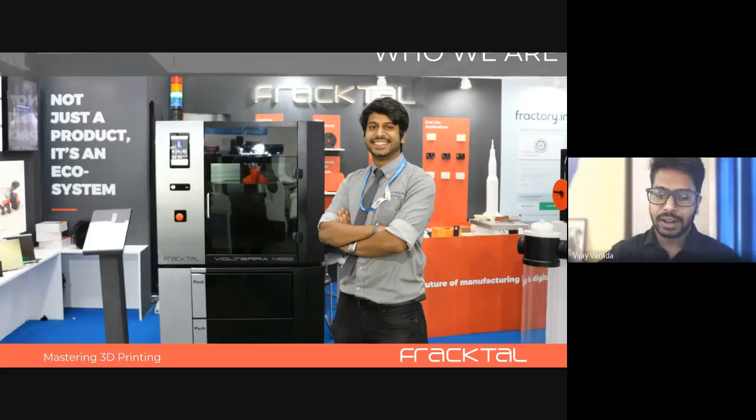So let's start. Before that, I think it's a good idea to give you an understanding of who we are as a company, what we are doing in 3D printing in India, what we really do, and what our journey with 3D printing looks like - what are the things we've done with it.

In 2018, we set up the world's first 3D printed wind turbine in Antarctica in the nation's colors. This demonstrates the usage of 3D printing in making access to high quality manufacturing ubiquitous. As a company, even though we're technologists who go hardcore into building better machines every day, we love using this technology and trying to apply it to solve different problems.

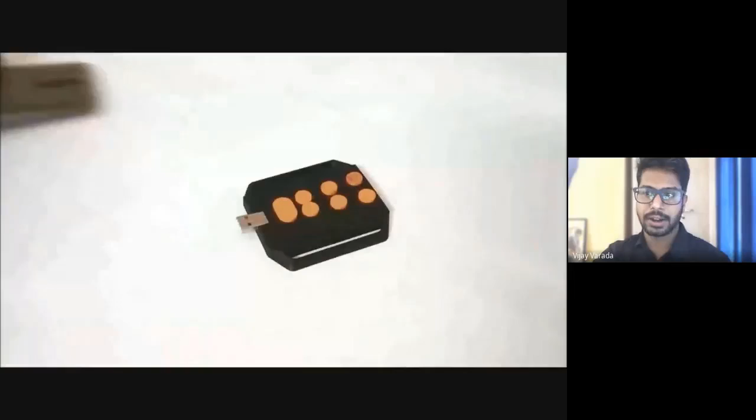Another project was using 3D printing to build an open source braille keypad that blind people can use to operate a smartphone, since smartphones don't have any physical buttons.

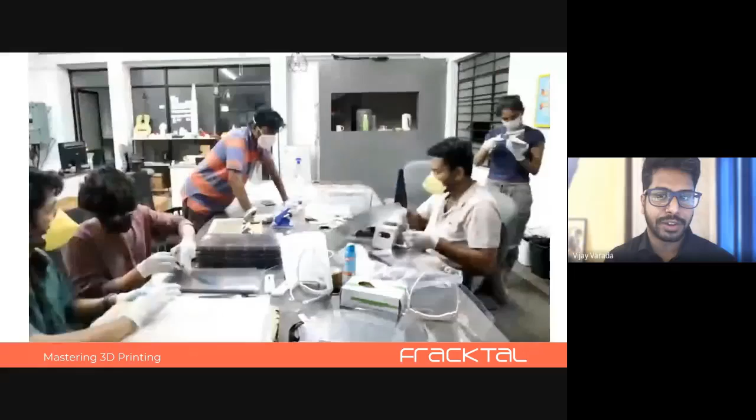During the pandemic, while global supply chains were broken down and nobody was manufacturing anything, we used 3D printing to get started with manufacturing. We used our 3D printers to distribute over 2 lakh face shields and PPE kits to healthcare workers and frontline workers all across the country. So the last year has been really exciting for how 3D printing has enabled us to come back into the limelight about how this different route to manufacturing can be beneficial to all of humankind.

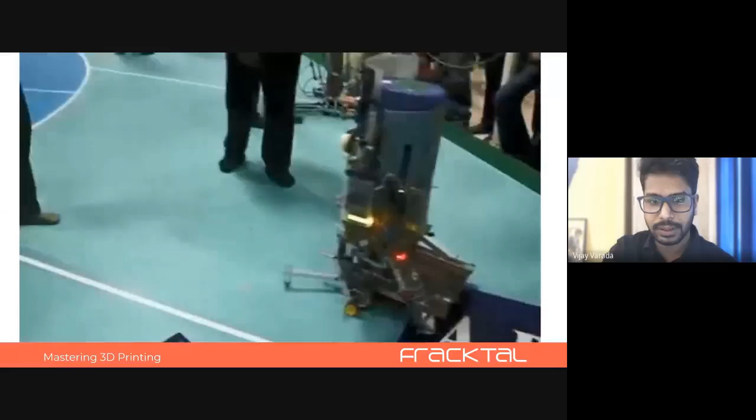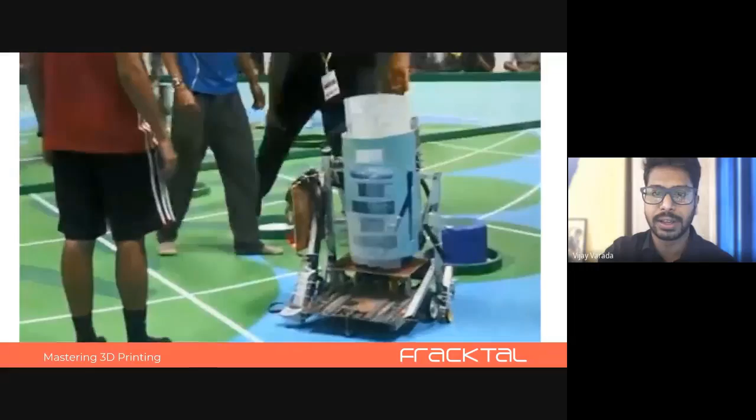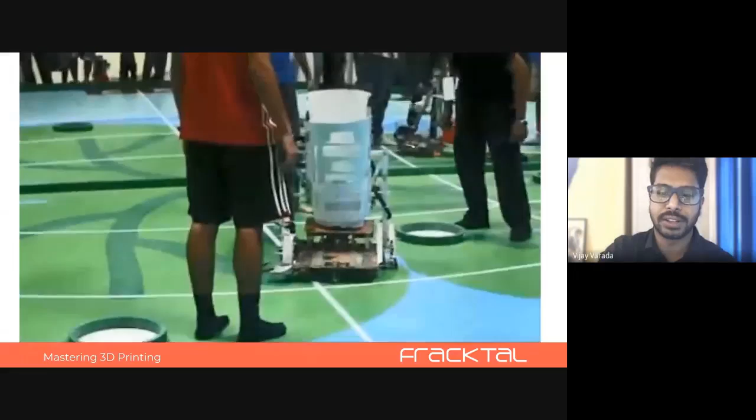So basically, 3D printing has enabled, say for example, a couple of college students - this was the robot we were building in college, with plywood and bits of plastic and things like that - 3D printing sort of enabled us to start our own company when we were still in college. And I think this is the significant aspect, and one of the reasons why I love 3D printing: it levels the playing field when it comes to high quality manufacturing.

It democratizes manufacturing. It gives high quality manufacturing within the hands of everybody. Our 3D printers would manufacture parts for other 3D printers, and we would meet up after class and build machines. That's how we started the company when I was in the 3rd year of engineering in MIT Manipal. It's been 8 years since then.

And since then we've grown the team. We're building large industrial machines in FDM, and now we're getting into SLA as well as the MIM space when it comes to metal 3D printing. So 3D printing itself has enabled us to build better products and move up the value chain when it comes to technology.

So coming to the big why - why are we doing what we're doing? Why am I here in this talk talking to you about the applications of 3D printing? It's because over the years, I've seen how exciting 3D printing can be, how liberating 3D printing can be, how empowering 3D printing can be.

But all of these are just examples, really, because the majority of the industry is still using traditional processes while 3D printing exists. My hope is to use this forum to plant the seed of curiosity about how 3D printing can apply to actual industry and add value to those industries, and thereby add value to the Indian economy. I think 3D printing has a big role to play in the Indian economy, and we'll see why I think so in the following slides.

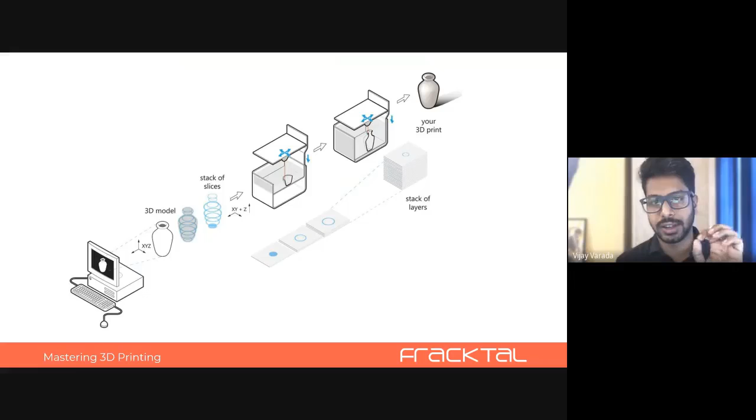I think that will give you context to the applications I'm going to be talking about - what does the core functionality of 3D printing have to do with the economics of manufacturing, and why exactly is 3D printing seen to be this next revolution? It's not the fact that it's additive, but the fact that it means certain things to the way we manufacture products today. One of the things is that 3D printing is a form of direct digital manufacturing, DDM, where you take your CAD file, your 3D design file, and send it to a 3D printer, and it gets manufactured in one single step, and you get a final product.

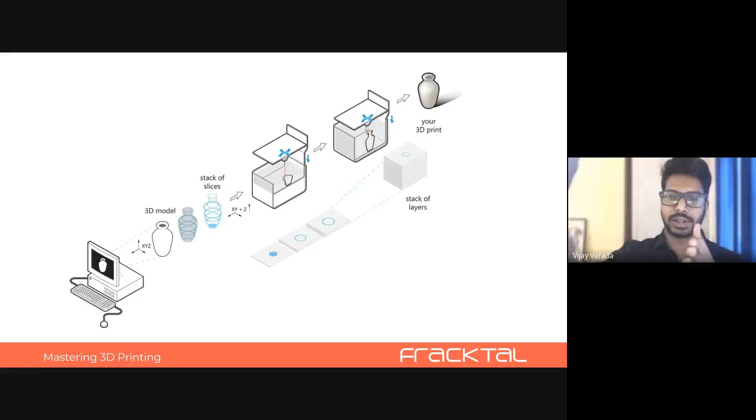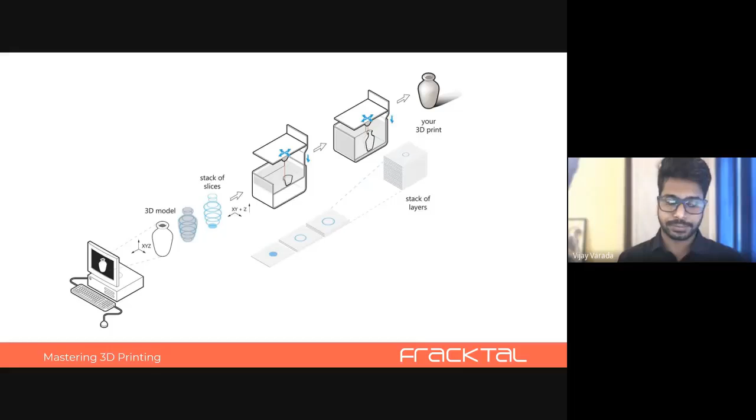This is in contrast to how traditional manufacturing works - say, for example, CNC machining or casting. You have several steps in between where you are manufacturing the tool, then using the tool to manufacture the final product. In injection molding, you make the tool first. In investment casting, you make another tool - making the wax master, coating it with slurry, burning it, pouring metal into it. So there are multiple stages in that manufacturing process, whereas in 3D printing it's a one-step manufacturing process. I think this is important to understand when comparing these traditional technologies with 3D printing.

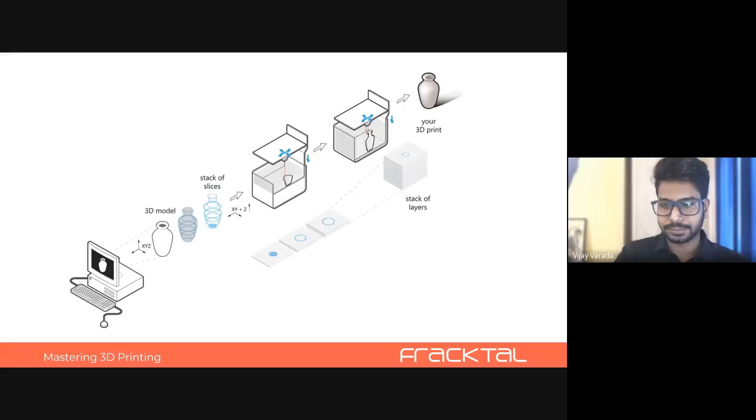Another question I get commonly asked is: is 3D printing going to replace traditional technologies like CNC machining or injection molding, or is it just too slow to compare? The answer is yes and no. 3D printing will replace traditional manufacturing in certain applications, and in certain applications, traditional manufacturing is still going to be the way to go. So 3D printing and traditional manufacturing are going to work together.

In subtractive machining or injection molding, the cost of making one part is incredibly expensive, because you have to create the tool path and figure out any tooling required. In injection molding, there's a large cost for the initial setup, your non-recurring expense, your tooling expense. With every subsequent part you make, the cost comes down. So there's a clear break-even point where additive manufacturing is preferred over subtractive manufacturing, and vice versa.

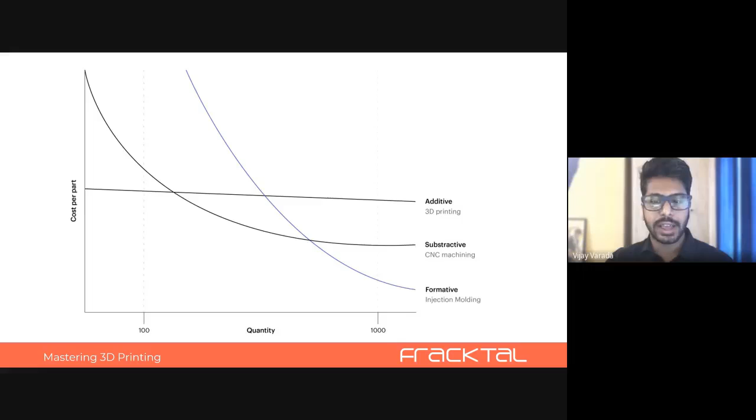So it really depends on the quantity of parts you are manufacturing. Depending on the quantity you want to make, you would select between a traditional manufacturing process or 3D printing. But there is a caveat to this, when it comes down to complexity.

There are a large number of examples of this, where you're consolidating various parts together into one complex part, especially when the volumes required are low. For example, in performance automotive or aerospace applications, where volumes are low but complexity is very high, 3D printing becomes a perfect candidate for manufacturing compared to traditional technologies.

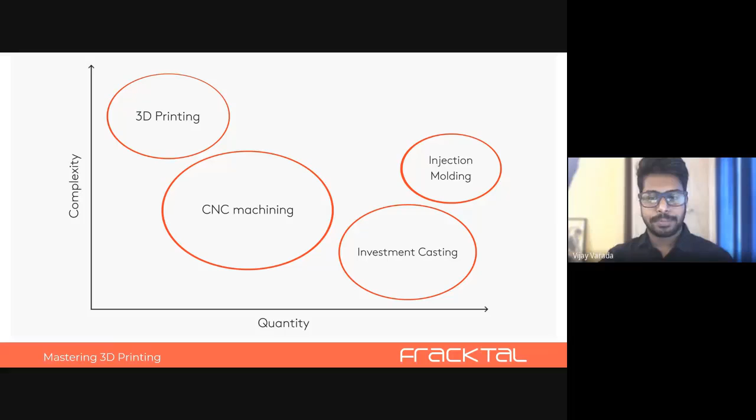For example, injection molding might get slightly incrementally better over time when it comes to cost, but 3D printing can take a completely different trajectory when it comes to replacing injection molding. That's what I mean by how 3D printing can be disruptive in several industries — they take a completely different graph altogether compared to how casting, forming, or forging works.

With that, we start on the different applications of 3D printing, which I've seen startups in India directly working with, and which are possibly things that would require people like yourselves to research more and apply, so that more industries can adopt it.

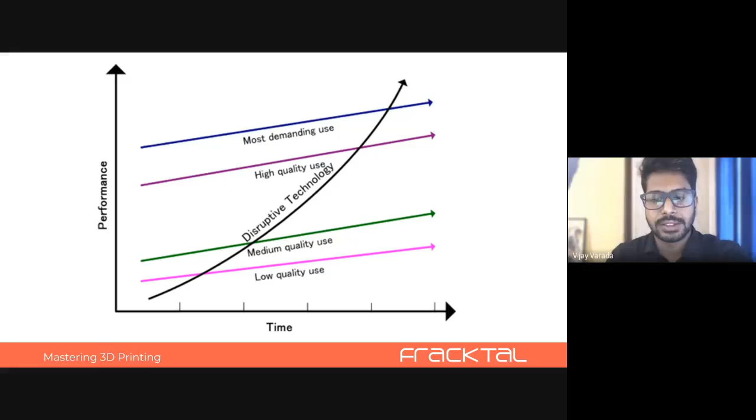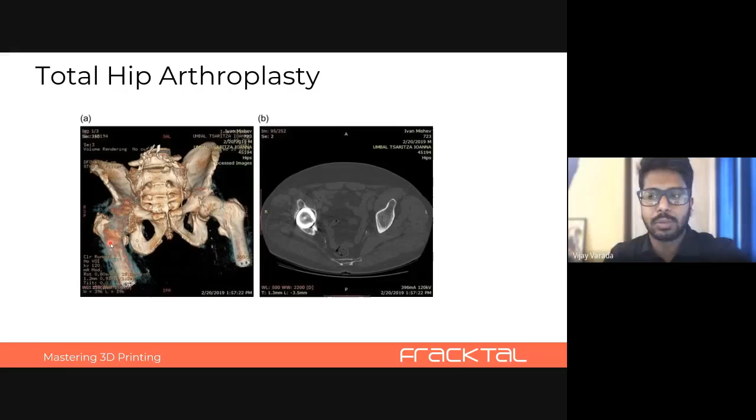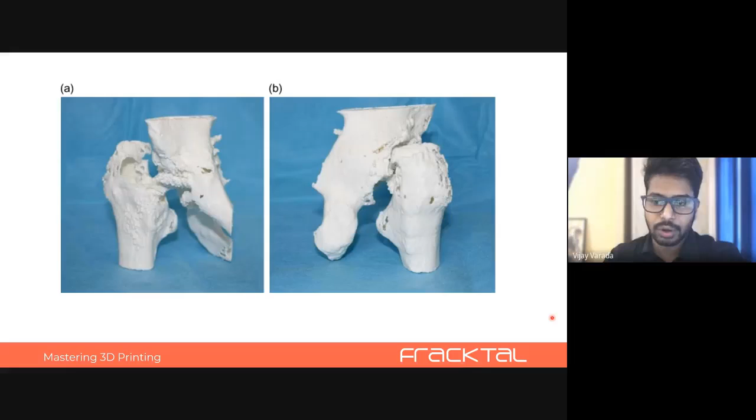So what doctors do is take the 3D model of the scan and then 3D print it. With this process, just by looking at it in addition to the CT scan, they can easily figure out all the parts of the bone which have the deficiency, and plan the surgery a lot better. For example, in hip replacement surgery, this is actually a drill used to drill a cavity in the leftover bone so that an implant can be made.

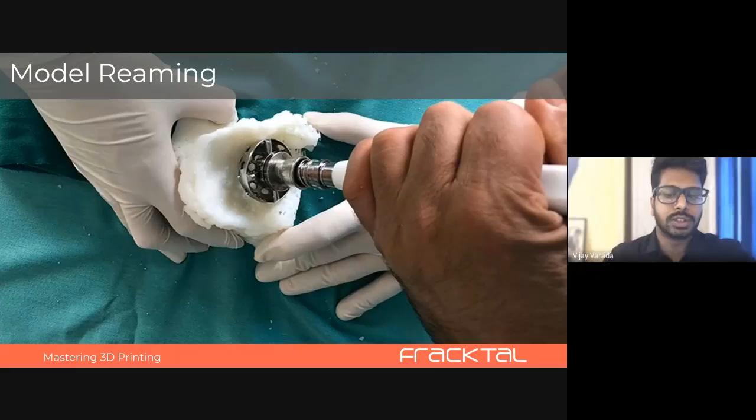Instead of doing this on a live patient, all of these things are done on the 3D printed part itself. The model allowed pre-operative surgical drilling, simulating the position in which the drill should be placed.

Afterwards, the acetabular cup is selected - what is the size of the cup, the ball socket that needs to be implanted into the hip - and all of this was done on the 3D printed part itself.

Traditionally, all these steps are done while the patient is on the operating table itself. Doing this beforehand, making sure you've selected the right components and know how your tooling is going to work and where to remove material, bone, and drill, improves the chances of surgery success. The patient is on the operation table for a much lesser amount of time, the doctor is not as stressed, and the chances of success in the surgery is way more.

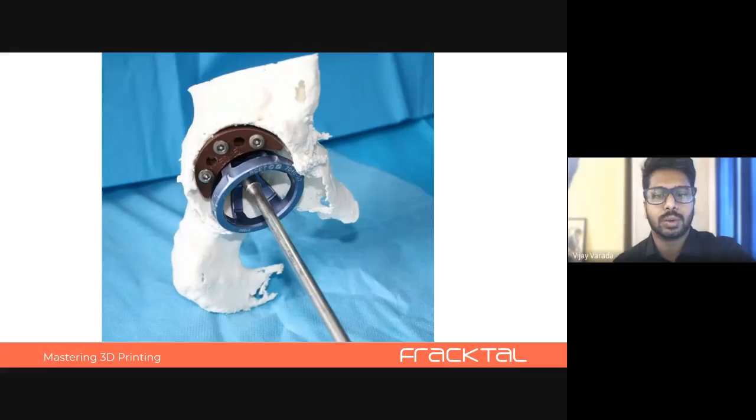Another example is where 3D printing was used as an implant itself by one of our customers. It started with a 3D printed mold created using the negative of a bone flap. A trauma patient met with an accident and lost part of her skull flap, so that part of the skull flap was modeled on a computer. The negative of that was taken and the mold was created, and using bone cement and titanium mesh, a skull flap was created and was subsequently implanted into the person.

So this is an example of implants. We've seen how 3D printing can be used for pre-operative surgery planning, where it's completely non-invasive and will help doctors perform the surgeries better, and also how it helps in implants as well.

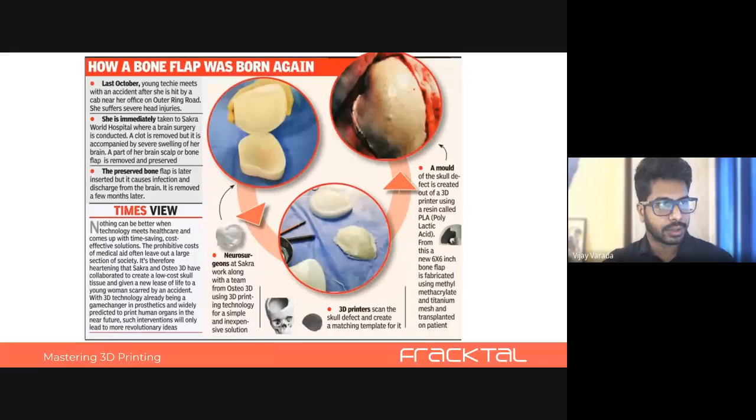So in summary, for this particular application, 3D printing helps get to an accurate diagnosis when it comes down to maxillofacial surgery, any sort of orthopedic surgery, and determines the best course of treatment in the pre-operative planning process, where the entire surgery can be planned out before actually being performed.

Next, we'll look at transportation. There's a lot of interesting things happening in this space. Let me give you an example of the kind of things that can be 3D printed.

From electrical connectors, hand rests, and headrests, food trays, industrial HVAC systems, air conditioning systems - all of these parts, say for example if you take a train, are custom made for that one train. Knowing about 3D printing, it's straightforward to know you can manufacture these parts on a 3D printer, but what are the benefits of it?

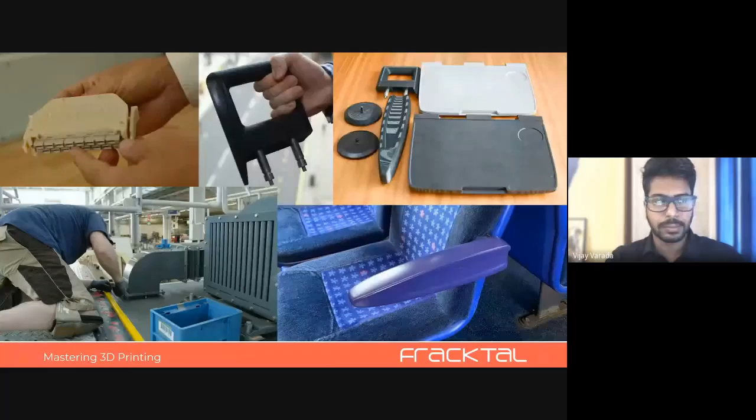Let's look at that. I've divided all the applications of 3D printing, and I'll talk to you about the kind of parts you can do with 3D printing across these 4 categories.

Starting at bridge parts - what are bridge parts? Basically, in rail, whether it's metro rail or intercity rail, interstate rail, the cost of having a coach or a train out of service is massive. The cost of having a single commuter train out of operation is lakhs of rupees in a day. With financial penalties adding up quickly, finding replacement parts fast is critical, because the alternative would be that the train needs to be kept out of commission for weeks. So bridge parts are basically parts used while you're still figuring out where you're getting the end parts done - it becomes a bridge between your problem right now and a solution later on.

Next comes low volume spare parts. Again taking the example of rail, costs for spare parts in the rail industry are incredibly expensive. This is because generally the service industry, second tier vendors, third tier vendors have to hold inventory for 30 years plus. Not only is keeping stock for 30 years expensive in terms of carrying costs, shrinkage, spoilage, but it's inevitable that some parts will go out of stock. When parts are not available in stock, they have to be recreated from scratch - this is where 3D printing is a massive game changer when it comes to the rail industry.

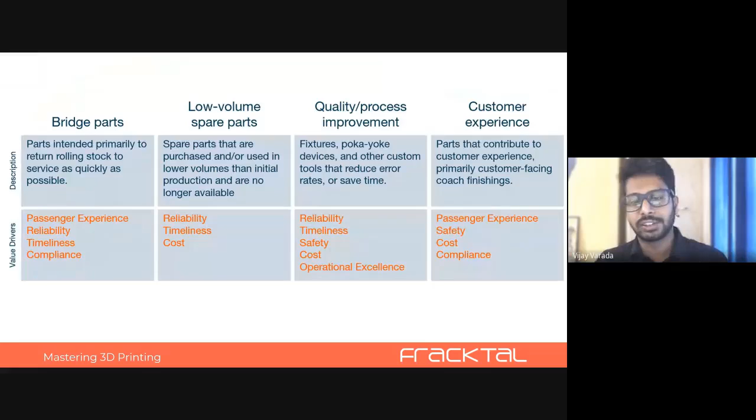I've already talked about the kind of parts you can make and explained the different categories of parts. But I think the next slide will give you a good understanding of the disruption that 3D printing brings.

Generally you have to overproduce and keep parts in stock, and then you have inventory carrying costs, shrinkage, and obsolescence. Will you still use that part 2-3 years or 10 years down the line, or will it change?

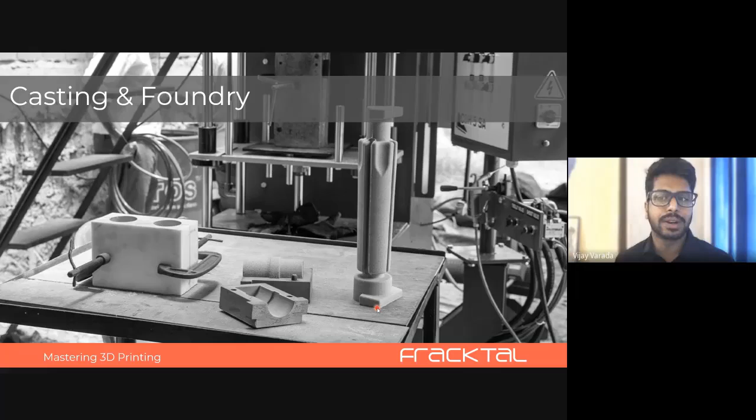Now coming to, I think, my favorite applications of 3D printing: 3D printing for tooling. This is definitely the lowest hanging fruit, in my opinion, when it comes to deriving value out of 3D printing, especially in the Indian industry. We've done a lot of work with Indian customers across industries about how 3D printing can be used to lower the cost of tooling itself.

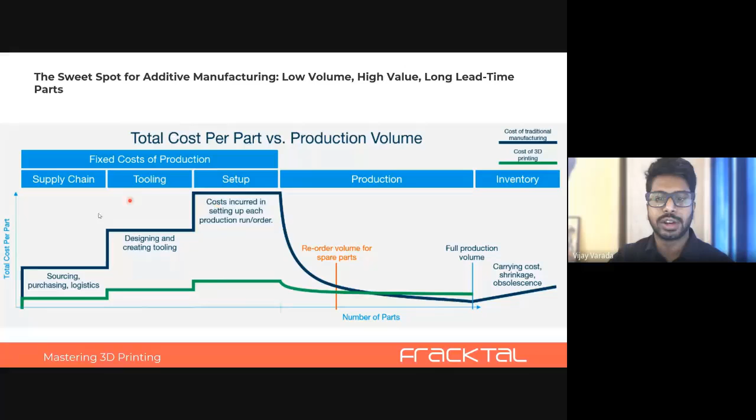Going back to this slide: the cost of tooling and setup is high. With 3D printing, you're still producing parts in a traditional manner, but 3D printing is used to reduce these tooling costs—starting with casting. I'll talk about sand casting as well as investment casting, metal manufacturing technologies made for volume manufacturing of metal parts. Casting in general forms a large part of the Indian industry—I think India is second or third in the world for casting production in terms of tonnage.

Across automotive, power, railways, pipes and fittings, construction, sanitary ware, engines—again, a lot of applications that use casting.

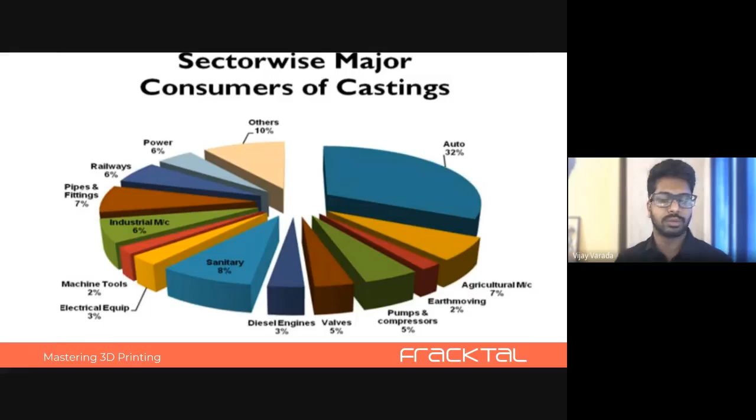So at least when it comes down to pattern making, how casting works is that you need to make one of these patterns, whether it's aluminum or wood, and this pattern creates a cavity in sand, and then you pour.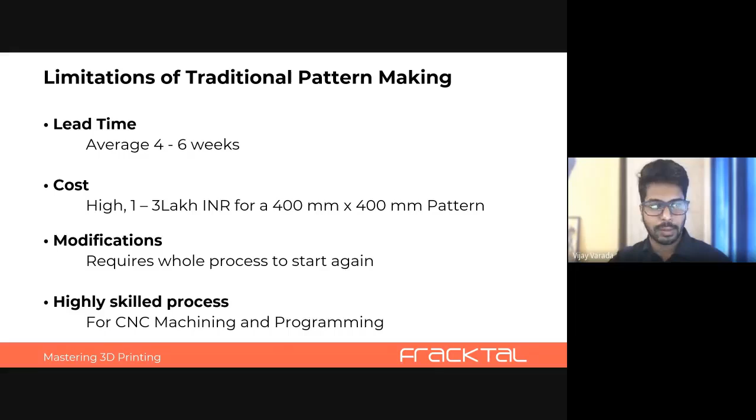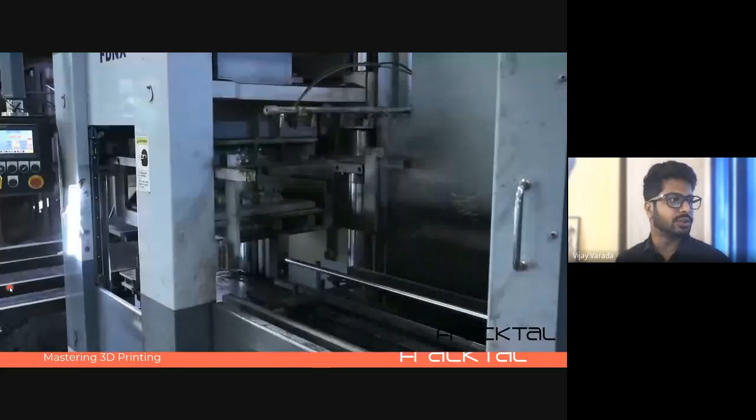So 3D printing really completely changes the game when it comes down to pattern making. You can see over here where we've put 3D printed patterns on a traditional match plate, and use the same process which is used by aluminum for packing the sand in a high pressure sand packing machine.

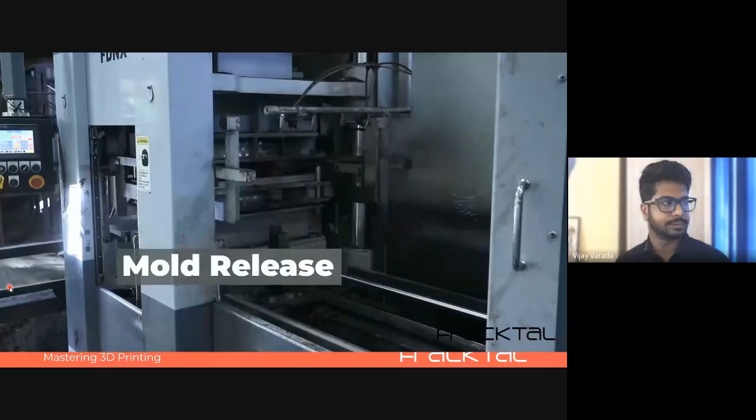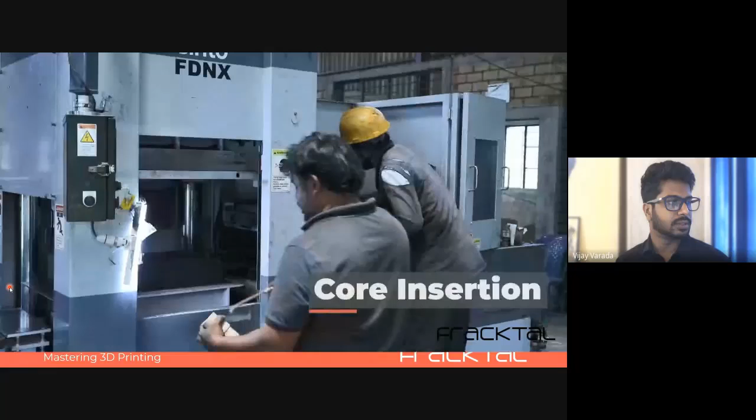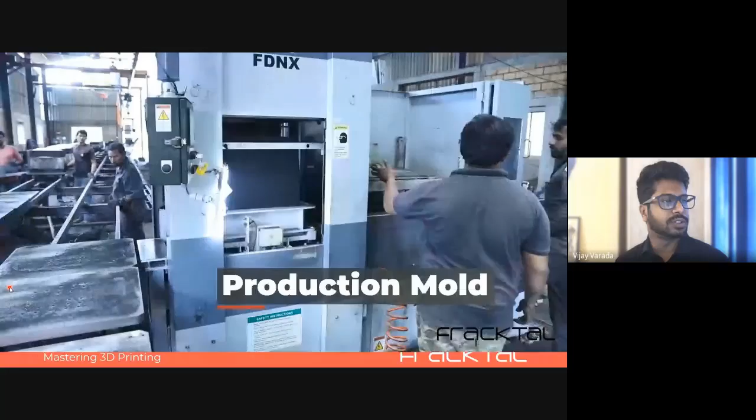And then even the cores, the core boxes that are used to create the cores as well—it's more or less, at least in this case, the entire process of using CNC machining and wood patterns for making out of wood or aluminum is completely replaced by 3D printing.

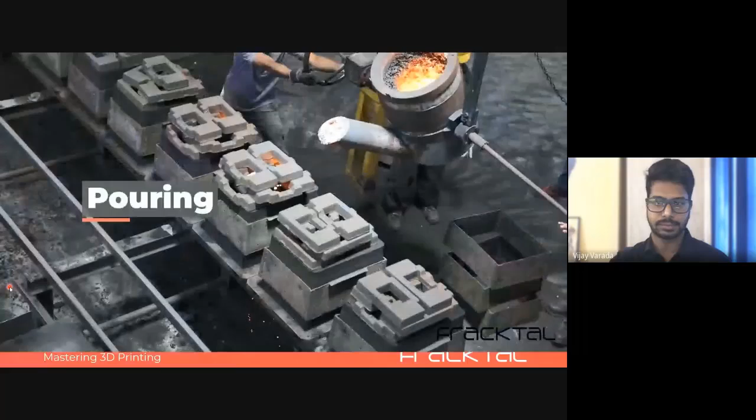What are the key benefits of using 3D printing for say casting or sand casting in general? Average lead time savings is 30 to 70%, where mods take 4 to 7 days instead of waiting a month or two. Cost reduction is great, 60 to 80%.

And because you're using 3D printing, you can always iterate things. For example, the casting industry is seen more as an art than a science when it comes down to how metal flows in the gating and runner system. So the process itself requires a number of iterations.

So for example, modifications when it comes down to the gating and runner systems of sand casting, and the optional use of interchangeable components if you need—if something's not working out, interchange it with something else. That's a really exciting thing to see with 3D printing, where you are iterating the tool itself so that you're getting the parameter you want.

And again, 3D printing as a process for production is completely automated. Once you give the part, the process of manufacturing is automated.

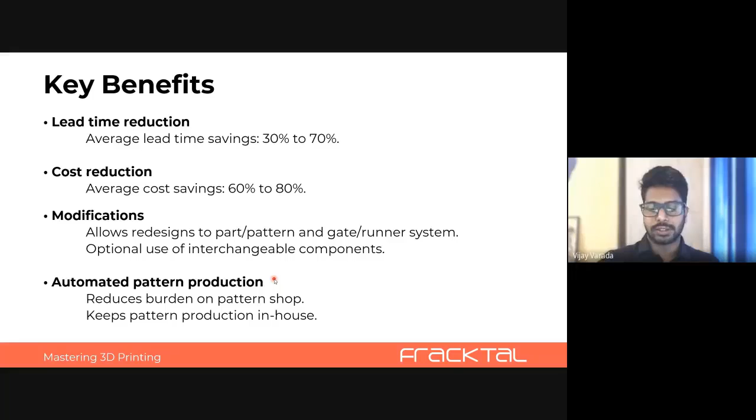So how does 3D printing compete when it comes down to performance? We did some research on this. Wooden patterns are what's popularly used—you would either hand carve it or use CNC machine wooden patterns, and it takes 2 to 3 weeks to make. It costs 25,000.

This is generally what's done by the industry for low cost, low volume patterns. Because the sand has some amount of moisture, the wood absorbs that moisture, bloats up, and changes the dimensional tolerances and things like that. So it's applicable for less than 100 sand molds.

Aluminum pattern is what is used for high volume manufacturing. Most automotive components might be using aluminum patterns, and you can get really high volume with this. But getting this tool made is extremely expensive as well.

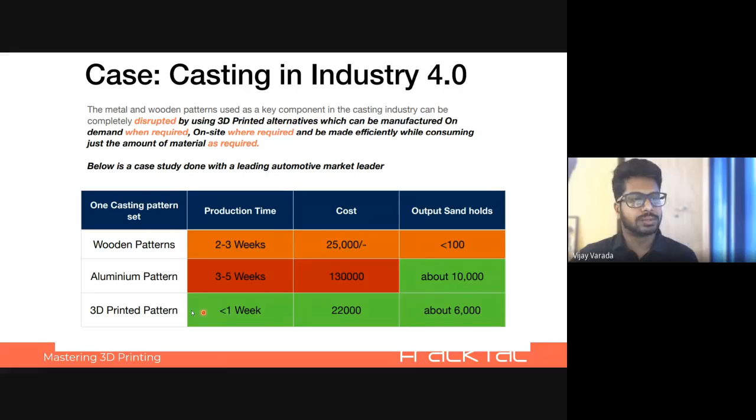So 3D printed pattern becomes sort of like a game changer for the casting industry, giving 5 times faster speed and 7 times cheaper compared to, say, a metal pattern.

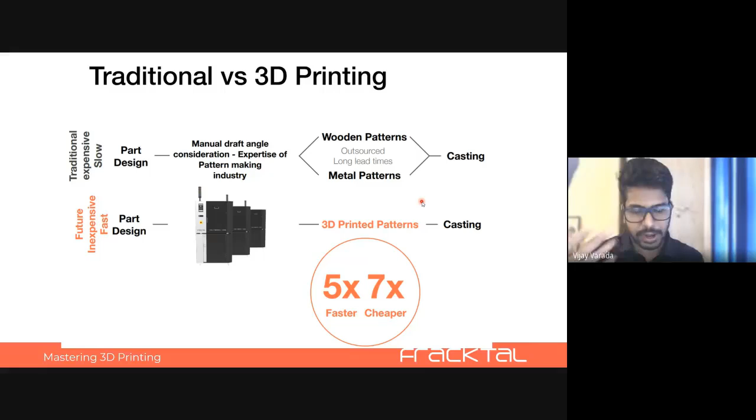Next kind of casting is investment casting. How do you use 3D printing for investment casting?

How 3D investment casting differs is that you would use a 3D printed master like this, made in a special material that burns out when exposed to high heat. This is coated with ceramic slurry and silica sand, then it's burnt out, and all the plastic melts out, leaving a hollow cavity in the shape of the part you want to make. Then you pour molten metal and create your part.

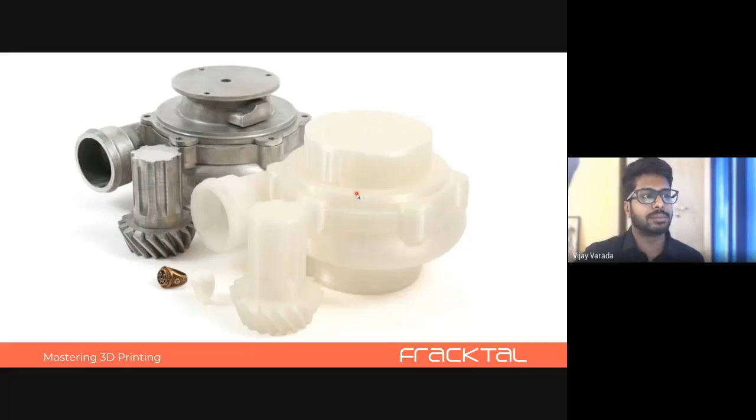One of the biggest bottlenecks in this process is that, just like in injection molding, you have to create a mold for this particular pattern you're making. It's like an injection mold, but instead of plastic, you're injecting wax. The same cost of tooling, if you're prototyping something in metal, becomes really expensive. So 3D printing becomes really useful for low volume manufacturing. Again, time also takes 1 to 2 months for creating a die and then starting production.

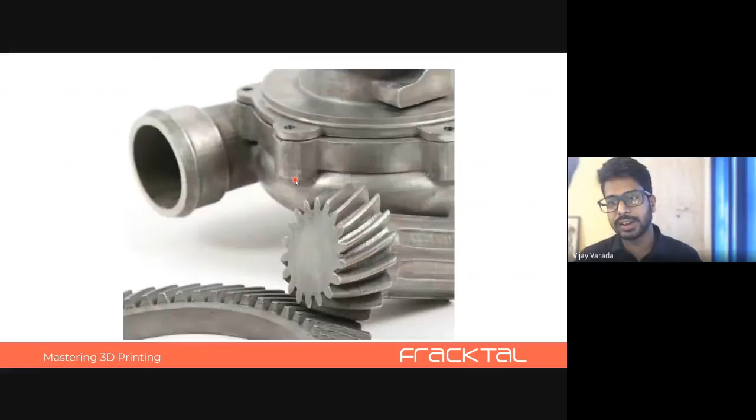With 3D printing, you can start making a part immediately, and you get high detail and resolution on 3D printed parts for proto samples. Another interesting thing is 3D printing the molds itself - we'll look at that later. Instead of using aluminum to create the mold in which wax is injected, you can use a 3D printed mold, say from SLA technology, so you get good surface finish and can create these parts in bulk. So you can use 3D printing as a mass manufacturing process in investment casting.

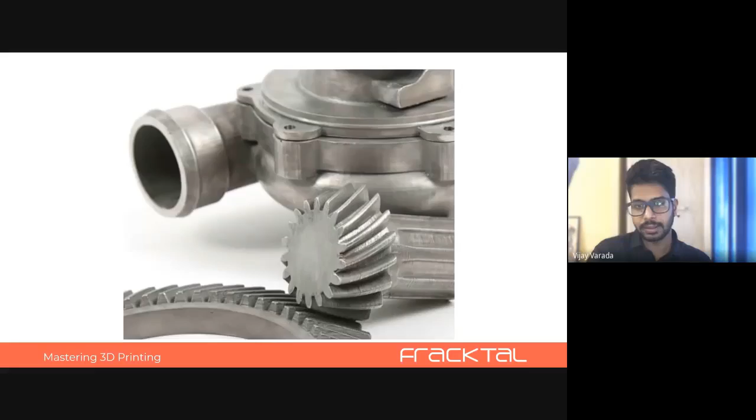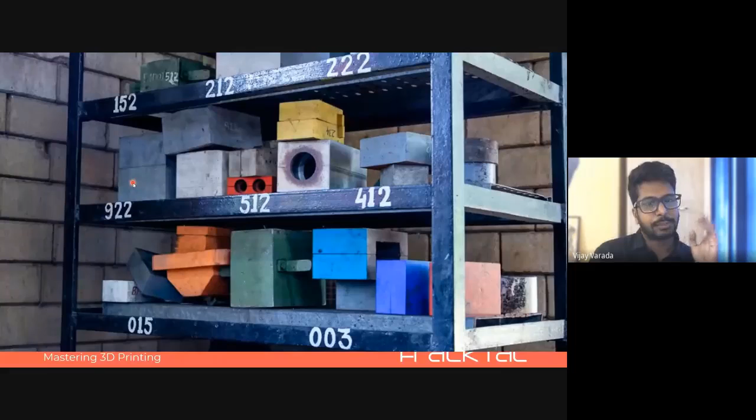I like this image - all of these are 3D printed core boxes, in the sand molding and sand casting industry. This is a customer of ours in Chennai, in Mysore, who completely shifted his process from aluminum to 3D printing because it gives so much more value versus aluminum and wooden patterns. So there's a little low barrier to start using 3D printing.

Coming down to it, now I'm going to go rapid fire showing a lot of different processes. I dove deep into casting and investment casting and other applications, so I'll just show you a bird's eye view of what you can do when it comes to 3D printing tooling, because this application is really vast and game changing in several industries where it can be applied. I'll go through these, and maybe we can have discussions afterward if you want to know something in detail.

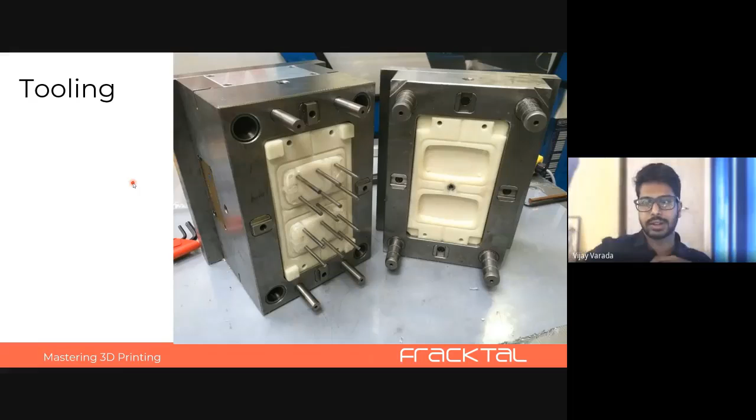Generally, I'm talking about how 3D printing is used as a tool to create a final product, and the final product is not necessarily 3D printed in itself. Starting with injection molding and blow molding for creating plastic bottles, either created in a blow mold - both can be created using injection molding tooling. You have a cavity in which you insert your traditional or your 3D printed mold.

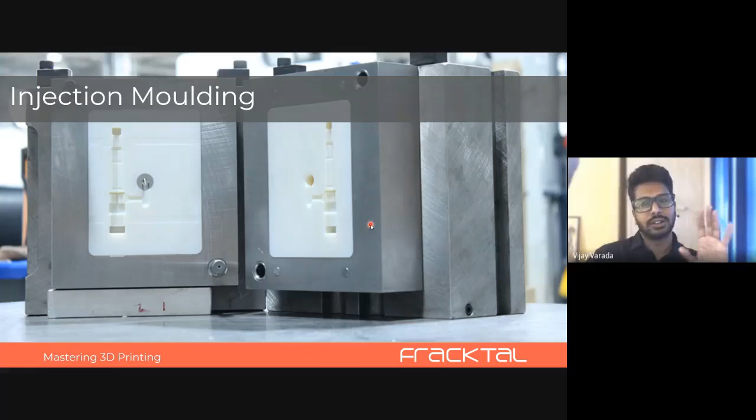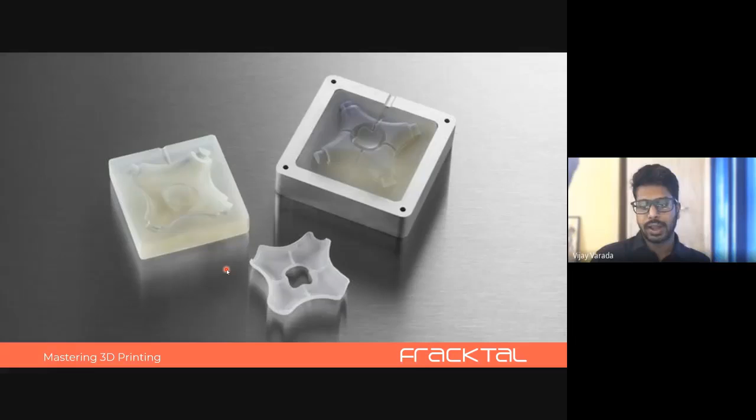There's another thing - while developing the injection mold, that's also an iterative process where you're trying to figure out different features, the tolerances you need to give, the shrinkage allowances, and a lot of issues that come up in the injection molding process itself. If you're not experienced enough or not working with an experienced vendor, this can be a long, tedious, and really expensive process to get right. So with 3D printing, you're prototyping the tool itself, improving it over the course of time.

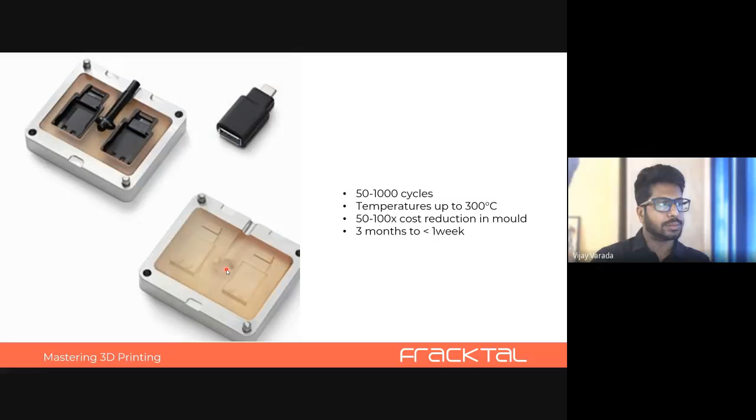You can get up to 50 to 1,000 cycles depending on various factors like the temperature and pressures being used. So 50 to 1,000 cycles of parts that you can make, and 50 to 100 times reduction in mold costs versus traditional injection molding. You can also reduce lead times from 3 months to 1 week, so you can get started with injection molding really fast. This is a really exciting application for how 3D printing can be game-changing when it comes to injection molding.

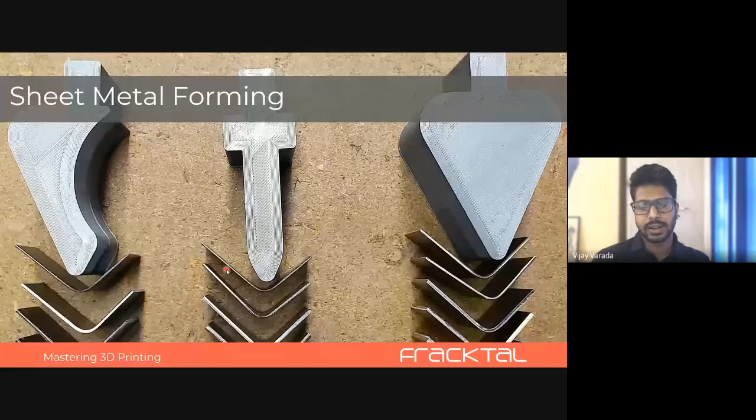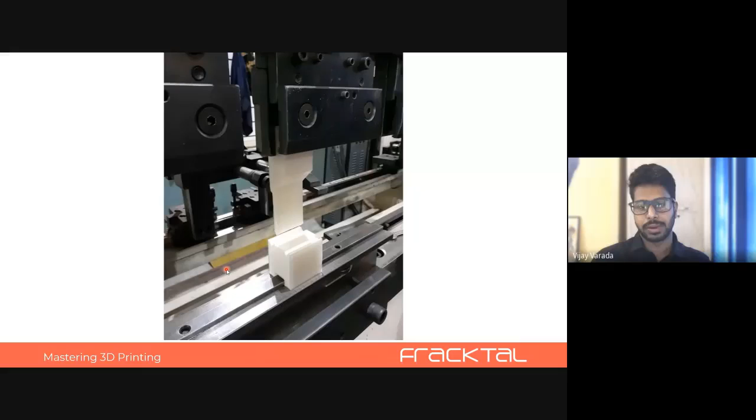Second is sheet metal forming, and I think this is an interesting application just for the fact that 3D printing is really strong, and these are parts created in FDM that can be used for sheet metal forming. Both the brake tools are created and are joined in an industrial brake press, and I have a video that I'll show you that illustrates how it's working.

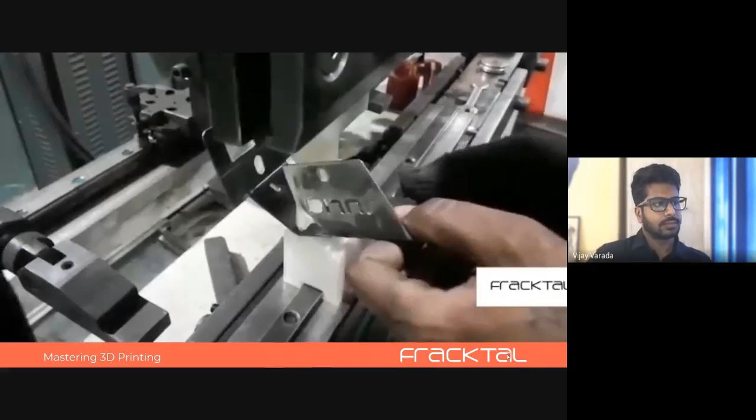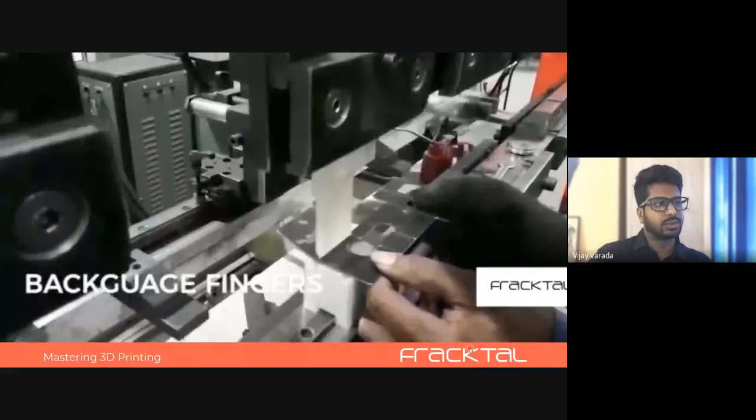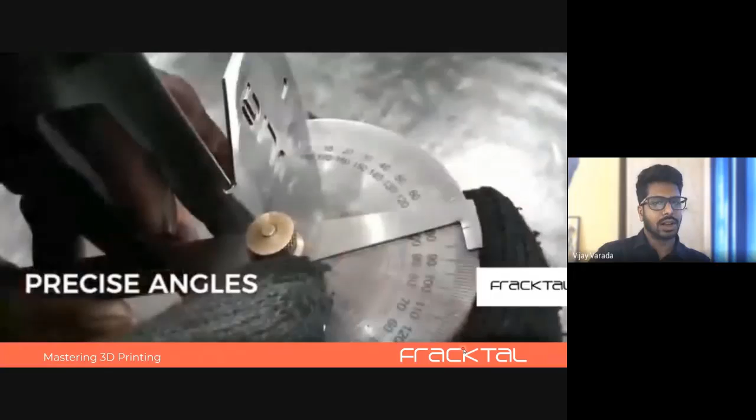So this is bending 1.2 mm MS, and this is actually parts of our own 3D printer. For any custom angles you need to give, or if you need to create a custom tool for forming sheet metal parts - generally these tools are made out of tool steel - but if you're just doing a prototype run, you can use 3D printing to get your parts right before investing in an actual tool.

Another thing is your CMM jigs and fixtures. When you have a complicated geometry that you need to create for a CMM jig, it's important. This is something I've seen where most machining companies that take up machining jobs will only do a sample inspection when doing all the jobs, and this is because of the high time required to set up a part on a CMM machine.

Another really exciting application is composite tooling - how you can use 3D printing to drastically lower the cost of composite tools. Either the composite tool can be 3D printed in itself, or it can be used to cast a tool in resin. Once that tool is cast from a 3D printed master, you can use it to create thousands of composite layups, both carbon fiber as well as glass fiber.

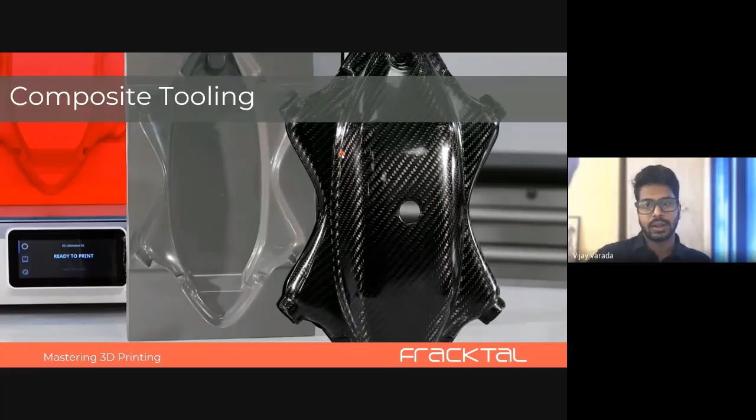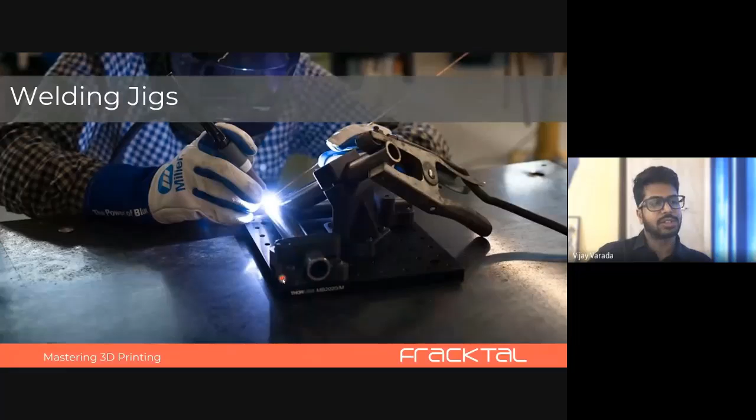Next is welding jigs. So when you have a complicated weld to be welded at different angles, you can use 3D printing to hold it in different angles, with materials that will be able to withstand the temperatures required by this sort of application.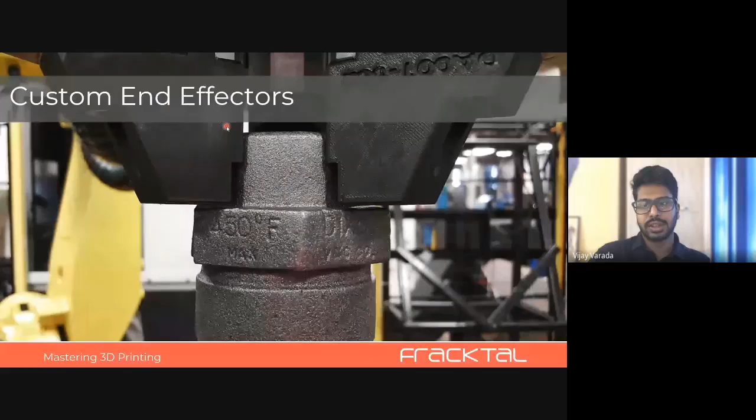Because they're not marring, if you're handling glass, or using tools for alignment on a car, you don't want to scratch the paint job by using something that's metal. So using plastic parts there really helps.

The last thing I'm going to talk about today is soft jaws, and I think this is something that is really exciting to me personally. When you have complicated parts like this, especially if you're not using a 5-axis CNC, how do you hold this on a vise? There's no straight edge to hold it.

3D printing can be used to create these custom tools for CNC, where you're not only reducing time for placement, but centering and everything is already done. So you can use these tools for augmenting traditional subtractive machining of aluminum parts with 3D printing to get more out of that. You can reduce the cost of CNC machining complicated parts by using 3D printing.

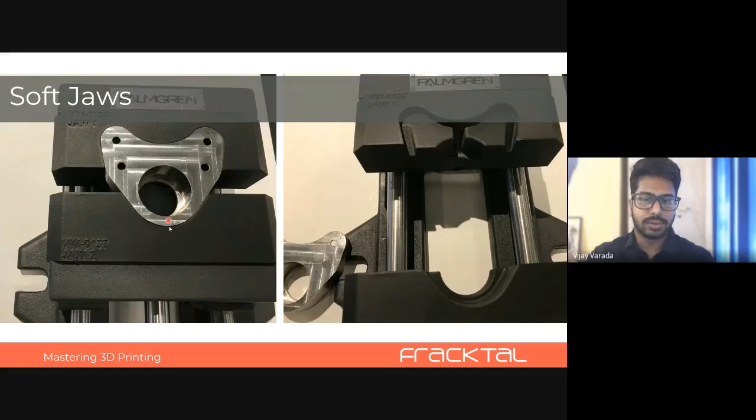Yes, Vijay sir. So Naveen sir, you can probably help me take questions on the chat, and probably you can read them out to me. Okay, we are waiting for their questions on the chat. Give them some time, they will ask.

But basically, let me ask my question before they ask. On an entrepreneur level, or on an industry, small scale industries or MSME level, if students or faculty want internships, something like that - how was your journey going into starting this Fracktal? I'm curious about that. You've given a good idea about what is 3D printing, which are the areas. Apart from that, I wanted to ask that also. So let them ask the question, by the time you can answer.

Sure sir, that is a long story. Neither me nor my co-founder comes from a business background, so this was all new to us. We taught ourselves finance, sales, marketing, operations after we graduated college, because we were hardcore technologists. We were part of the robotics team in college, and I think I showed you a video earlier, right? So we were basically building robots in college for project work and competitions, and we wanted to get better at building robots. That's when we learned about 3D printing.

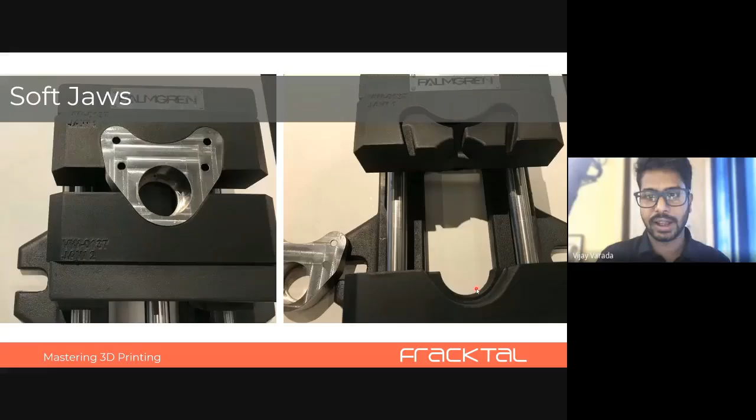So at one go, the largest part that we can make is 600 by 600 by 600 mm. But again, there are ways of joining them together and making one large part as well.